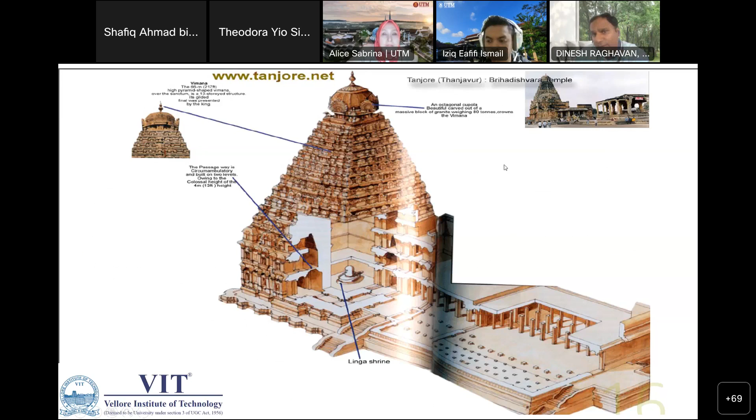I'll show another example. The Chola temples are characterized by circular and square sections, beautified inner sides of external walls, special vimanas on the upper side of the sanctum, dome-shaped shikara, kalasa on top of gopurams, integrated sculptures, inscriptions on the walls, and pillared mandapas. There are many mandapas, like the Mahamandapa, Nandi Mandapa, and others.

This is a typical detail of the Chola gopurams. If you look at this vertical face, the wall is divided into two stories by means of an overhanging cornice, which is the only horizontal member. It contains pillars, pilasters, and niches with sculptures.

In the middle of each recess is a figure subject, and the sculpture seen here stands as God at the gate. The entire periphery of the temple base consists of mythical animals and lions. These are typical characteristic architectural designs of Chola temples carved into the temple walls, stone structures carved into the walls, and decorative niches depicting sculptures.

Pilasters are magnificent architectural designs carved as projections in walls, with deities placed within. The pilasters are positioned on both sides of the main Devakutas. We also have the kudus, which are two lion heads with crowns, covering the roof of the pilasters. These are some of the typical details found in Chola architecture.

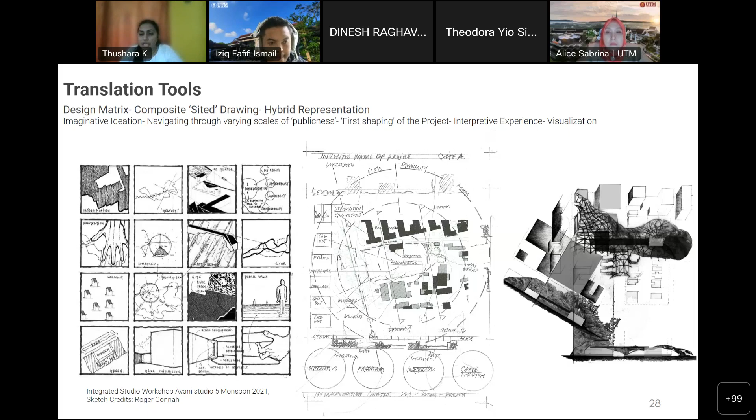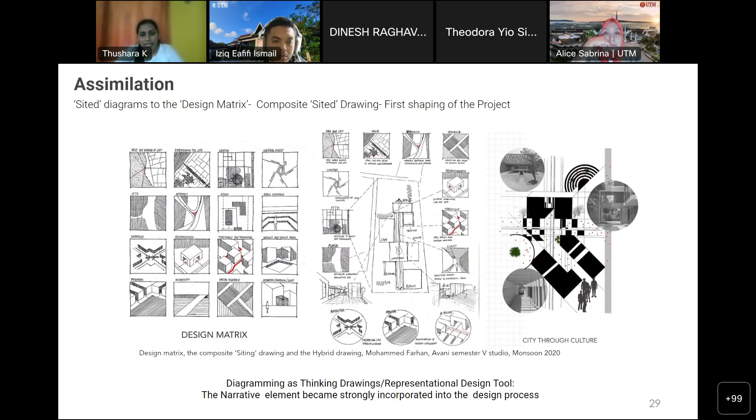So these are some student work samples where they try to understand, starting from city scale up until the sites, various levels of translations distilled to specific areas in architectural hybrid drawing. It's a spiral method, one informing the other. It was done through a non-linear methodology, combining both an analog and digital manner. These are some sample student works.

Moving on to the third stage, which is a derivation of a responsive project, students took forward the reflections gathered in designing an interpretation center. We have given two sites of historical confluence for this. So this is about the first studio.

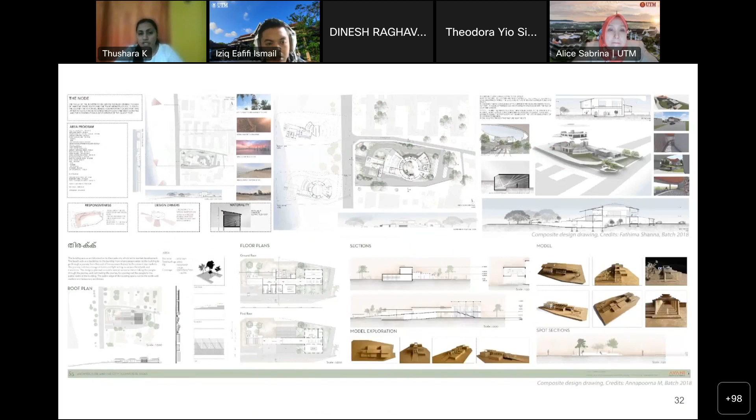Moving on, this is in fact the response that we obtained as a responsive project after the end of the first studio. Moving on with the second studio, which is an extended academic research on a responsive environment for Kozhikode, through re-looking at the critical vernacular.

The focus inquiries were on, in the context of cultural landscapes moving towards homogeneity, what could be the response to this historic plurality when we approach architectural design? How can we resituate ideas, aesthetics, and practices of the past in the contemporary city? What could be the responsiveness to the heritage, city form, and publicness?

In this slide we are seeing the critical vernacular architecture along the beach road of Calicut, where you can see the fine grains, which is superimposed by the new developments.

Two of the most important aspects of the methodology are narrative design tool and interpretation. This study uses narrative analysis techniques to explain how the vernacular can be used as one of the significant design approaches at this point.

Adapting the primary investigation and design methodology, we expand the previous architecture and city studio, which was inquiring on the emergence of the cultural landscape.

This studio on responsive environment penetrates into the deeper layers of the architectural identity and diversity of the built environment of the city of Kozhikode, thus attempting to address: how can contemporary architecture respond to the history through built form, fabric, and memory.

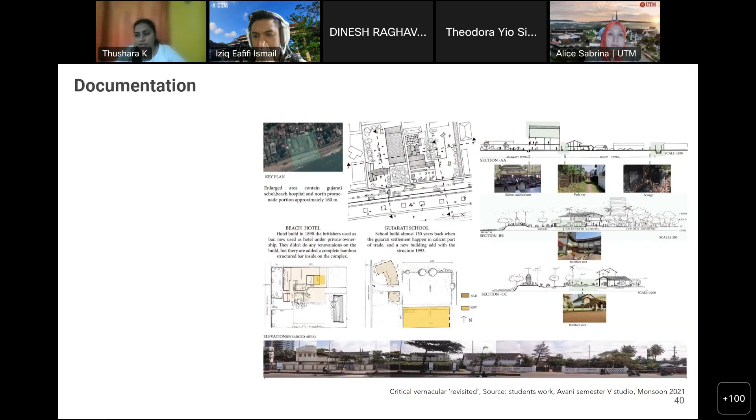And these are some deep documentation that they have done on the critical vernacular and the critical modern, understanding the identity of the place. And the translational tools, here we started with more of a relational narrative detail where students can understand the essence of the space, which was then translated into a design matrix, represented in a more relational format with each other.

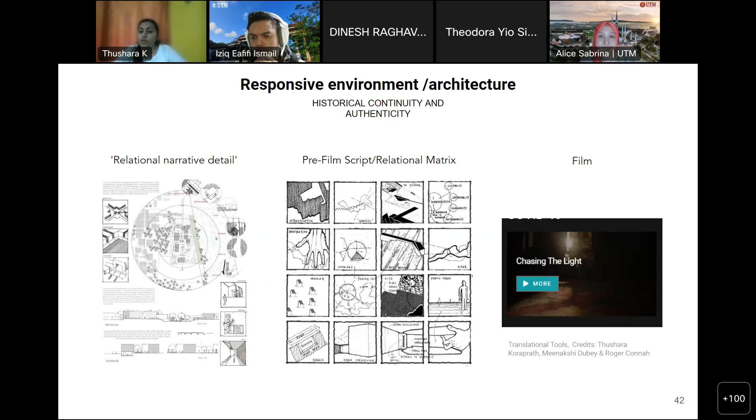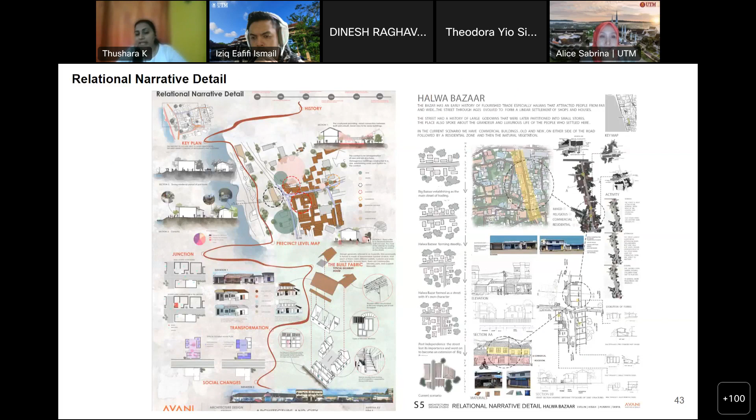This also began as kind of a pre-film, as an exploration method for their idea of the city, because this also ran in a very hybrid mode, starting on an online platform, then slowly moving into an actual studio platform. So these are some examples from the student works on relational narrative detail, where they try to understand critical vernacular in the historic urban landscape of Calicut, different parts of Calicut.

These are some relational matrix developed by them, understanding what the city and context mean to them, ending with responsive architecture and environment in the 16th matrix.

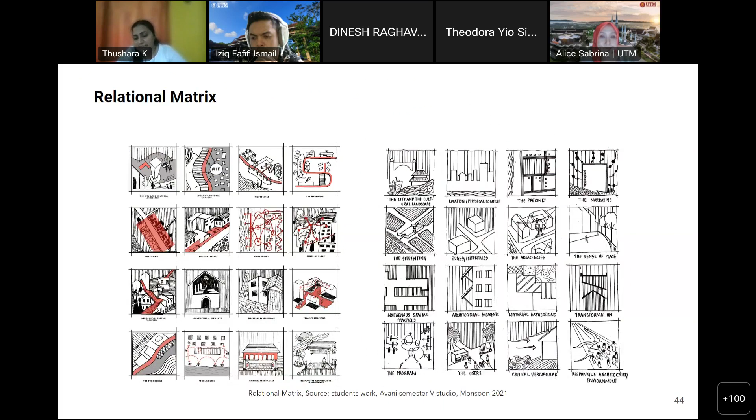So we have collaborated through a workshop with Professor Roger Connah in developing it into a pre-film and a concept for the program. So later, moving on with the responsive project, students started with creating a vision diagram for the project and a responsive open program, which can be a completely greenfield project, brownfield project, or critical landscape project.

So the responsiveness here meant responsiveness to the critical history of the city, climate, technology, material and construction, current challenges of migration, inequities, and socio-cultural publicness.

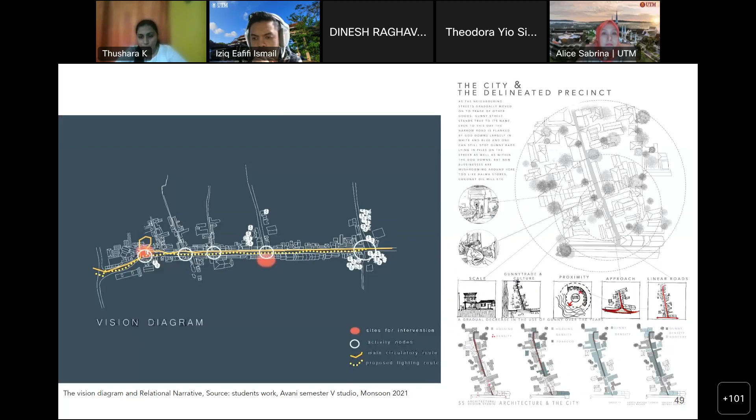So these are some of the images of student vision diagrams where they have developed a programmatic approach and the relational narrative detail. And these are the relational matrix and few of the outcomes which responded to the critical vernacular when designing a new project for the city.

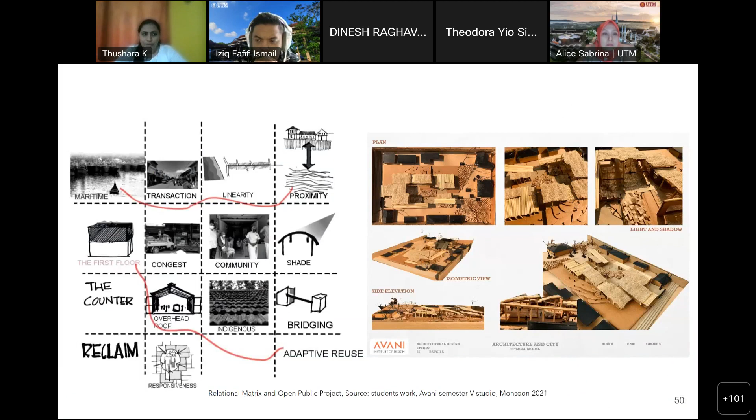Before concluding, I would like to reflect on a few aspects that we understood through the research. In the context of the contemporary city moving towards homogeneity, not responding to the historic plurality and cultural expressions which is unique in determining the sense of place of the city, spaces result in generic urban spaces with characterless streets, enhancing the crisis of identity and contextuality.

This methodological alternative that we propose strongly advocates a responsible and responsive approach as an emerging concept mediating continuity in contemporary urban developments and cultural landscape. The methodology argues for an evaluation of regional practices, revisiting the critical vernacular and specificity in terms of materials and spatial practices, to innovate critical vernacular solutions for the future. We propose this as a fundamental approach without being nostalgic about the past, and as a requisite in contemporary and future development proposals.

And what could be the way forward from here? This analytical model can help in critically deciphering any cultural landscape of our choice. This is a spiral method of revisiting the design decisions and arguments, connecting the dots and reinforcing the logical inferences, following which unique individual expressions or versions of the projects can emerge.

This is a responsive dynamic pedagogy responding to the global scenarios of changing landscapes of academic practice. In fact, the academic research goes on at Avani, where in Studio 2022 we explored the cultural context of Trivandrum, the capital city of Kerala. At the institutional level, in collaboration with Avani Heritage Cell and Avani Malabar Studio, we are planning to continue this documentation process, also in line with the larger institutional vision of making it a regional repository of the Malabar region in Kerala.

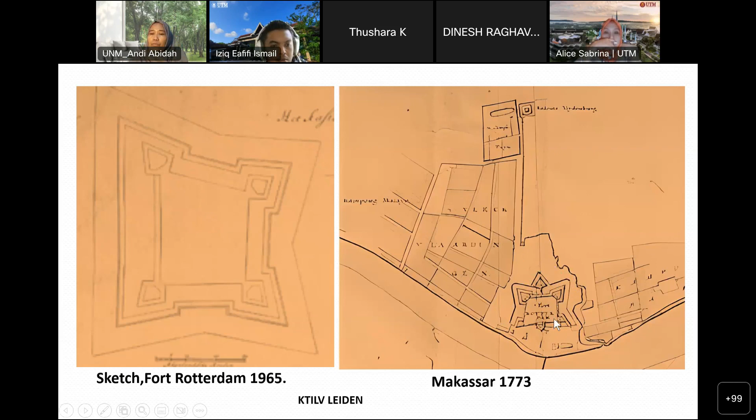After that, rebuilt and renamed from Ujung Pandang to Fort Rotterdam in 1669, it became the center of Dutch colonial administration, military, trade, and port activity in Makassar. The fort was strategically located on the west coast of Sulawesi, overlooking the harbor of Makassar, which made it an ideal

location for the Dutch to establish their presence and control over the region. The fort was tied with Dutch colonial power in Makassar, and all government military activities were centered around it. The Dutch East India Company, or VOC, used the fort as a trading post and center for the collection and distribution of spices, textiles, and other commodities.

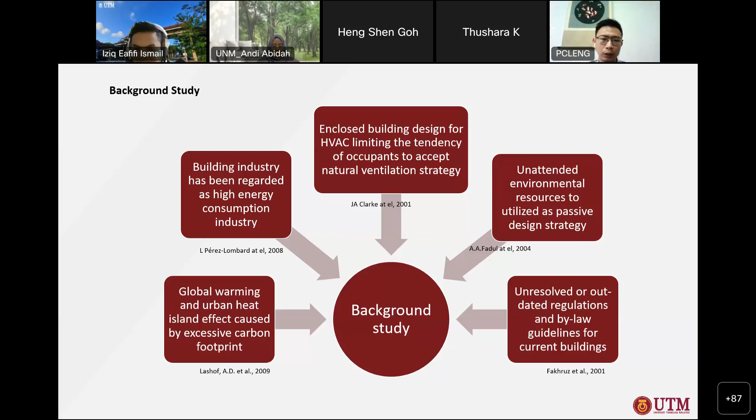When people talk about green building, most focus on new construction. But the research focus here is on existing buildings—how we can help them have a chance to function without air conditioning, using passive design or green strategies. Instead of focusing on offices, housing is the main majority of buildings found in Malaysia, especially after urbanization throughout the decades since independence.

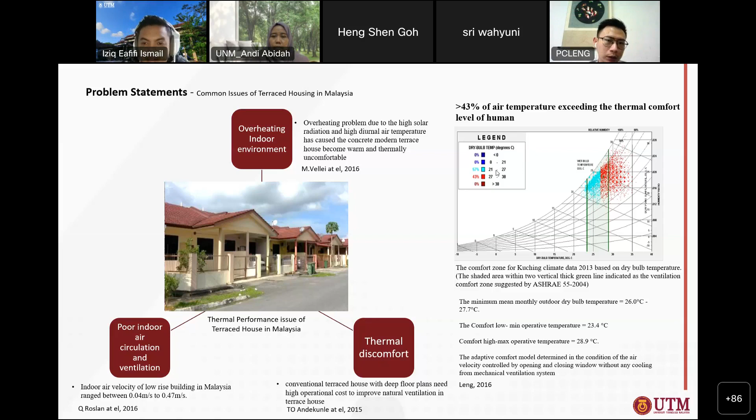In terms of methods, most people, long time ago, preferred to go for the scale experimental model or the full scale experimental model. Due to advancement of technology, slowly we moved into analytical studies, mathematical formulas, empirical methods, and so forth. But there's some incompleteness when using just one of them—for example, if you use the full scale experimental model, probably you have limitations.

Because to study ventilation, you need a lot of money and cost to build a real one-to-one scale model, which is not really practical. Other than that, mathematical formulas also have some limitations. Building simulation, CFD, is one of the latest technologies widely applied in natural ventilation studies. But in order to verify, that's why in my study I'm trying to combine both.

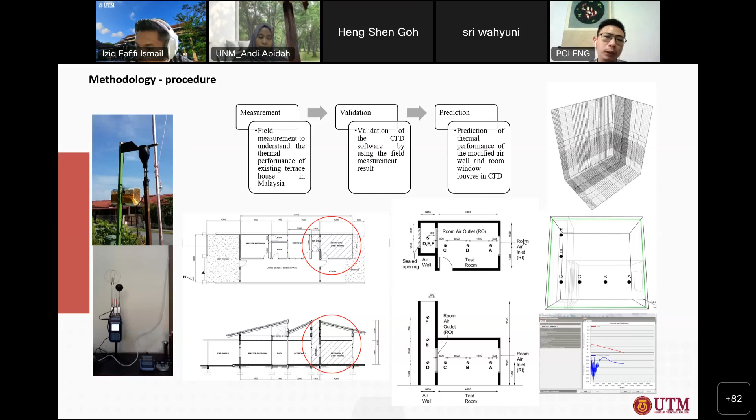So these are the few measurements. We start with measurements, then we do validations of the software, and last, we try to predict the modification of the air well into a solar chimney in order to see the performance of the ventilation in the second case.

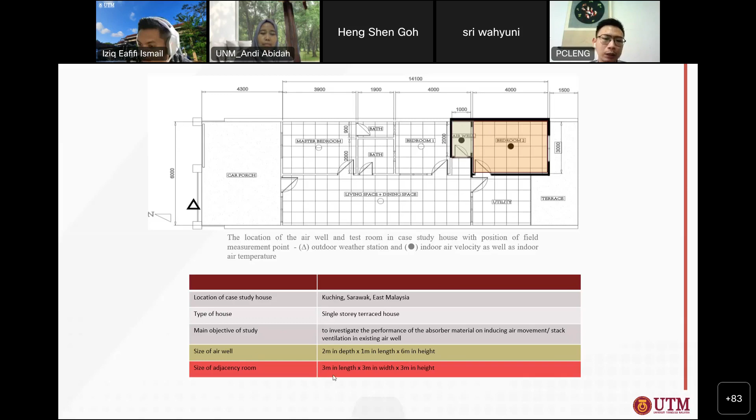By using this without any modification, we can see the performance of the existing layout, materials, and context of the building, to see whether it works or not. The existing air well is around 2 meters in depth, 1 meter in length, and 6 meters in height. The adjacent room is around 3 meter by 3 meter by 3 meter, a typical room as we usually see.

For the field measurement, I have plotted points A, B, C, D, E, F. Basically A, B, C are the 3 sensor points located in the room, and D, E, F are in the vertical sectional elevations where the sensors have been placed.

So for the bedroom, we selected bedroom 2 as a test room, to measure and use as a benchmarking room. Then for the rest of the rooms, we're still doing measurement, but just putting air temperature and relative humidity sensors in order to compare the results and monitor them.

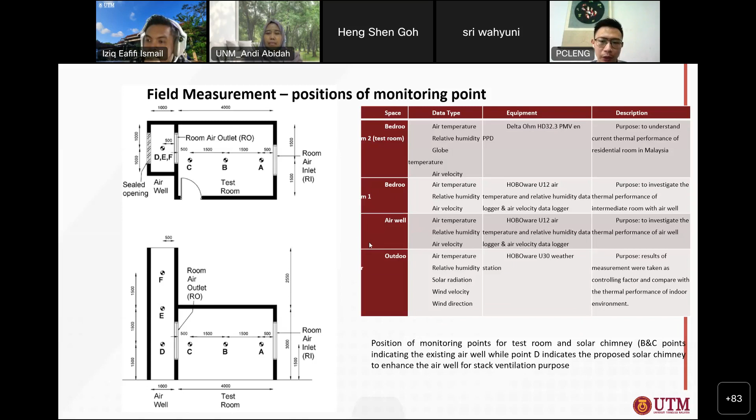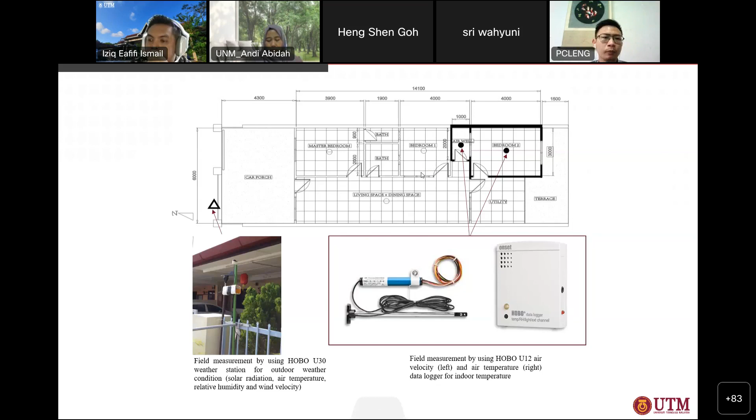For the outdoor side, we need another outdoor weather station. Even though we can't really get a huge or standard size weather station, this could help us compare the indoor and outdoor environment. For the findings, you can see the average existing test room thermal conditions.

We have sorted the results into 3 types of days: hot days, considered high temperature days; cold days, which are low temperature days; and normal days. Most of the time, other than these two situations, we consider it a normal day. Analysis has been done.

So if we convert into predicted mean vote for thermal comfort and PPD, we can see that most of the time, regardless of hot day, low temperature or cold days, or even normal days, it falls under warm conditions, which is not that suitable or comfortable if we follow ASHRAE 55. So that's why we have to do something after seeing these results from our field measurements.

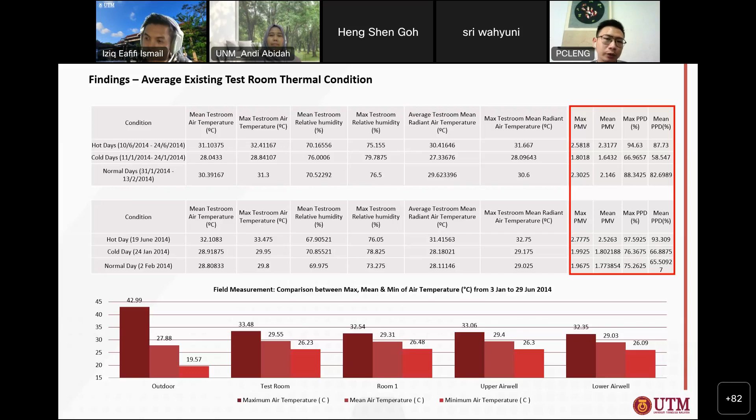Here comes the simulations. So now we know the issue from the first objective. Now we're going to see how we are going to improve further.

So in this case, we're trying to combine louvers or air well ventilation through single-sided ventilation. Because the rooms actually have a single side window, that's why we have limitations here. Hence, in order to induce more ventilation, we have to create another opening through stack ventilation. That comes the so-called cross ventilation, but through temperature differences—in this case we call it stack ventilation.

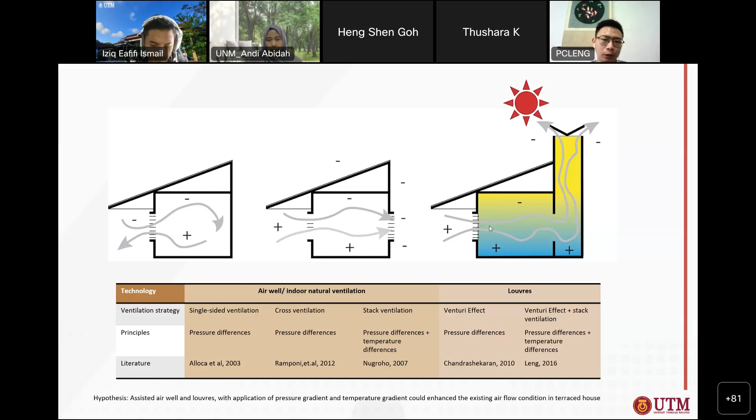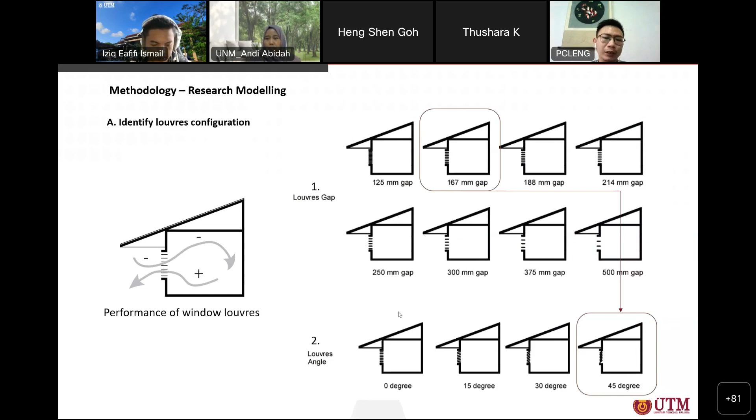Methodology: as you can see here, the first phase will be using the louver gaps, trying out different gaps of the louvers and louver angle. After testing, we can find the best configuration.

The findings for the louver gap show that the 167 mm slat gap was able to produce more consistent and constant air speeds compared to others. Even though the average airflow result for 125 mm was close to the 167, the airspeed was reduced towards the ends of the room. Hence, at the ends, we still prefer 45 degrees together with the 167s.

Then the second step, after we have defined the so-called optimized louvered window that can induce more air speed into the indoor environment.

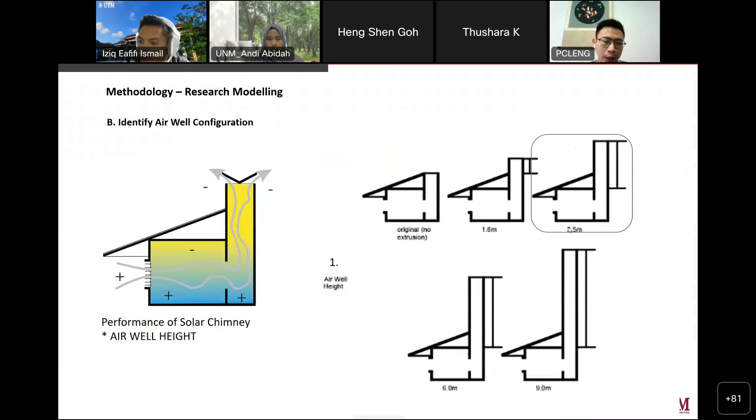So the second thing we wanted to do is get the airwell height. We tested different heights first, and at the end you can see that the airwell height of 3.5 meters can give you the optimized result. So these are the results.

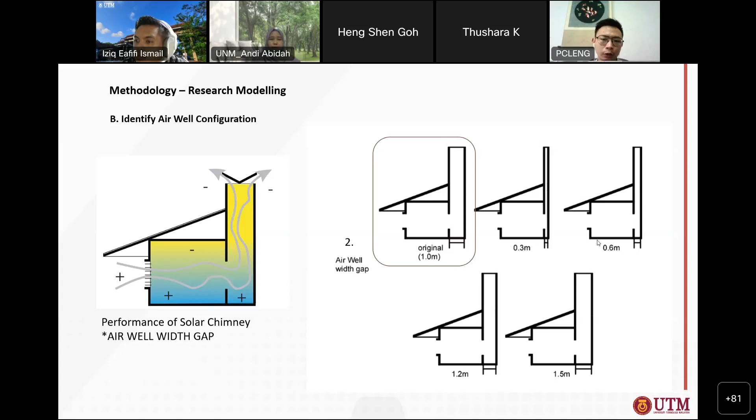For the second step, after identifying the height of the solar chimney, we tried testing the original length, the airwell width gap, or so-called length here. After trying this out, we found that 1 meter, the existing 1 meter, still gives you the optimized result compared to others.

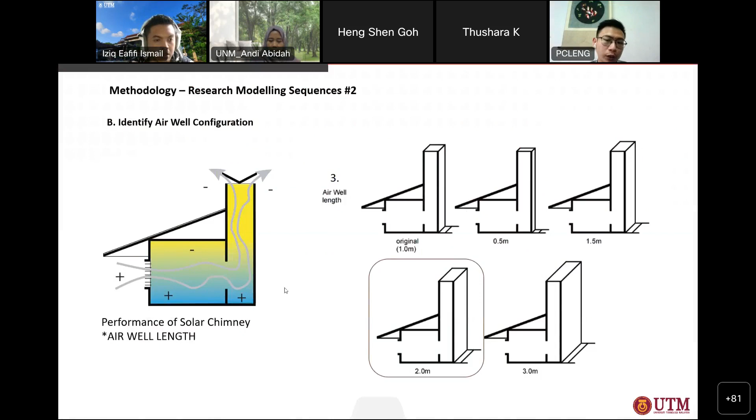Then the other one will be the length of the airwell. After confirming the height, the length gap, the width gap, as well as the louvers, you can find that 2 meters long still gives you the best result.

So we can see that for the optimization of the airwell configuration, a stack height of 3.5, 1 meter width gap, and 2 meter length was obtained. That can deliver a reasonable mean indoor air velocity of 0.34 meters per second with a mean air temperature of 30.7 degrees Celsius. Moreover, the 1 meter width gap configuration can produce a 3.6 degree temperature gradient between the shaft, at the top of the shading and the airwells, as well as the test room.

Because in this case, we need more temperature gradient between the indoor environment and the tip of the solar chimney, which will give you more pressure difference.

Then after that, this is followed by more significant air speed or air movement from the outdoor environment to the indoor environment. So overall, these are how we tried to identify the configurations of the airwell as well as the louvers that give the better combination to induce more ventilation in the housing.

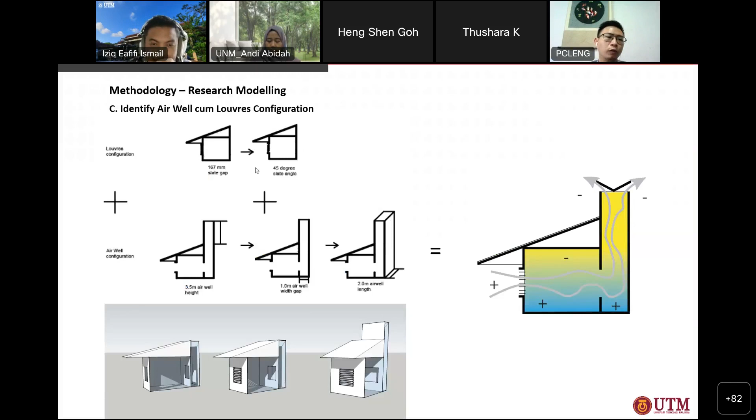So starting with the louvers, followed by the airwell configuration, then this is what we get. Overall, these are the configurations shown in this context.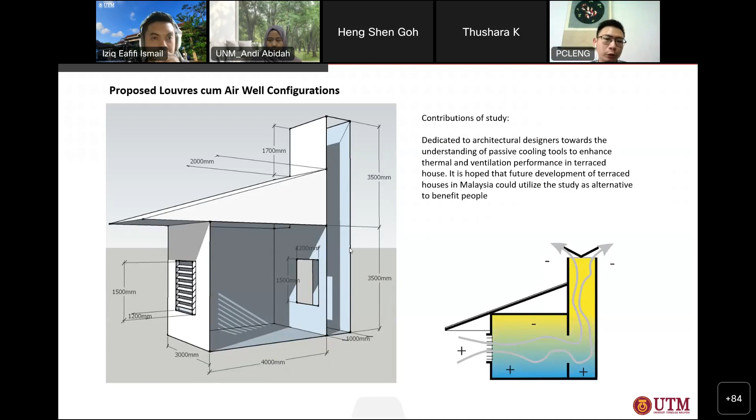So these are the summaries of the airwell that have been shown just now.

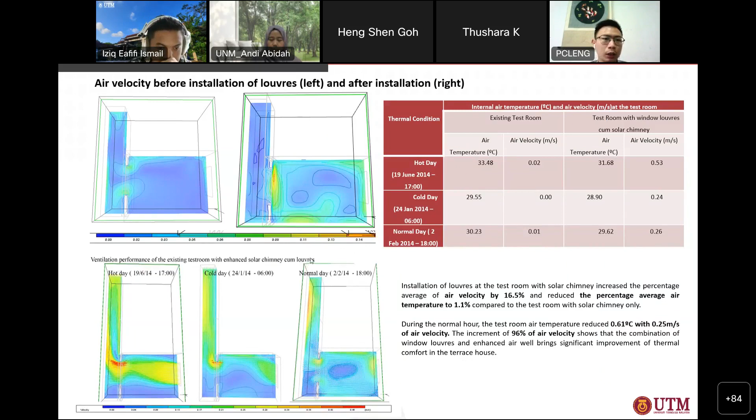For the conclusions, we can see that the poor thermal performance of existing buildings is actually one of the main concerns, and this is why the idea of this study came about. We allow small, minor amendments to existing buildings, especially for domestic housing, in order for them to achieve good ventilation instead of replacing it with air conditioning.

And a green neighborhood character—so probably in the future, the solar chimney, if it can be accepted, can be promoted around, and that could become one of the characteristics of housing areas as well. This could also become a good message for policymakers, especially for mass housing and terrace houses, who wish to go green.

So policymakers could probably tap into this consideration when they make policies or blueprints for neighborhood development in the future. Yeah, I think that's all from me.